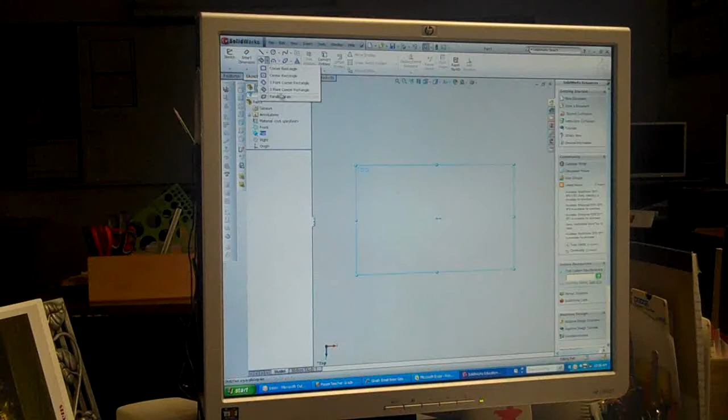Okay, technical drawing, page 596, 1936-1. We're going to go to top view, top plane, and we're going to do a 3-point center rectangle. This is for the vertical piece, the 1.5 square. So you select the origin, stretch out, sort of just create a box.

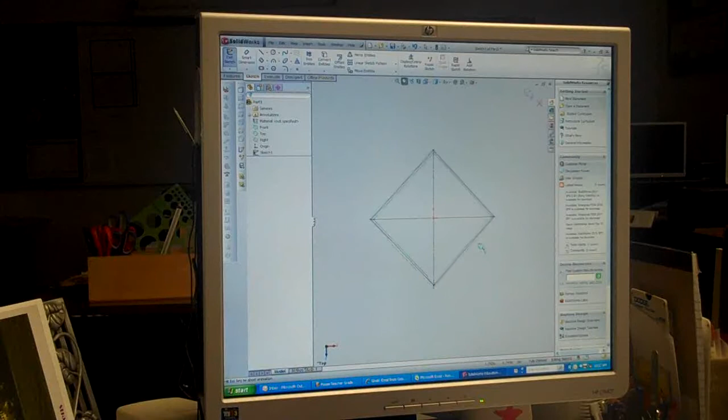We're going to grab this, we're going to add a relation, make it horizontal. Then we're going to grab this piece and add a relation and make it vertical. And then all we have to do to define it is define its outside dimension, which is 1.5 inches. We're going to zoom in. We're going to create our usual offset of 20 thousandths.

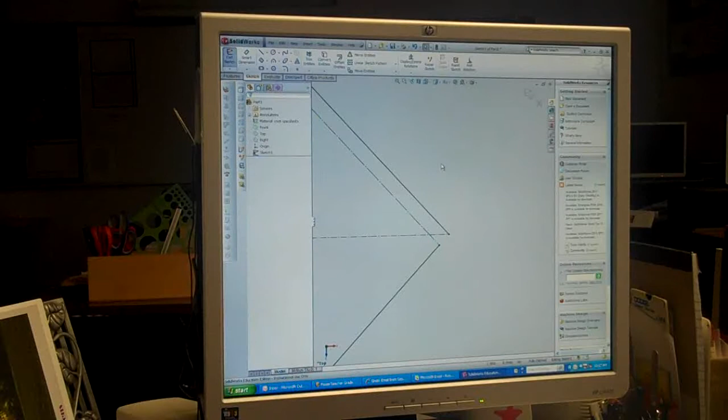Okay. We'll zoom in there. Change that to construction. Happy check mark. We're going to trim closest, create the gap. And what else? Fillet 0.02 at the remaining 3 corners. 1, 2, and 3. And then if we go to the ISO, we can extrude this.

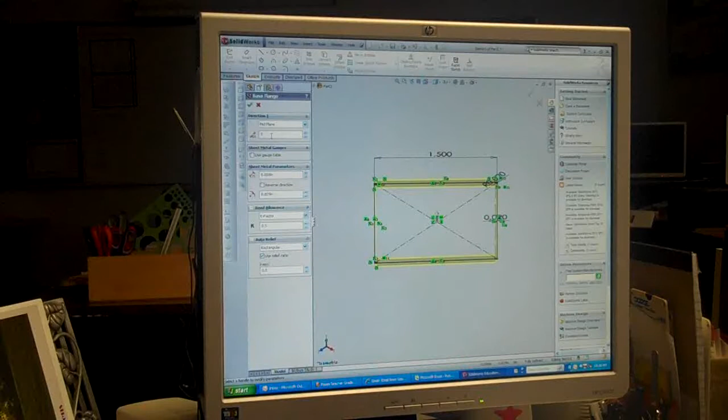We're going to do a mid-plane. This is going to help us because if you look at all these parts, they're all centered, for the most part, about a common axis. So you have to sort of look at what you're drawing and then see where that common axis is. So we're going to do mid-plane. This thing is 3 inches tall. And we're going to keep the thickness as 0.02.

Okay. And let's just check. Like I always say, check, make sure it flattens nicely. Suppress that again. And we're going to save. This part, I'm just going to save it as number 3. You should change it. Save it as 1936-1 for the first part, -2 for the second. We're going to save.

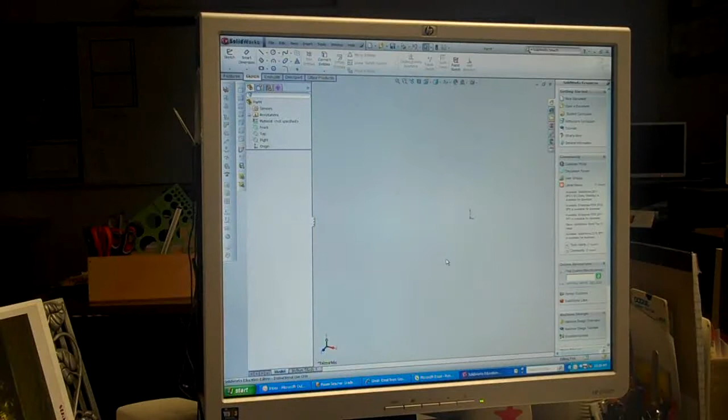File. New. Another American part. USA, because it's all English. We're going to go to the right view. And we are going to sketch on that plane. We're going to do the same type of box. Stretch it out. We can't add relations to anything yet because we need a center line here. And we're going to make this vertical.

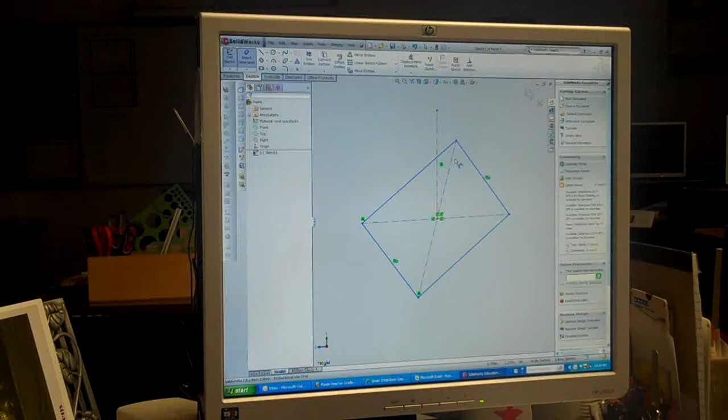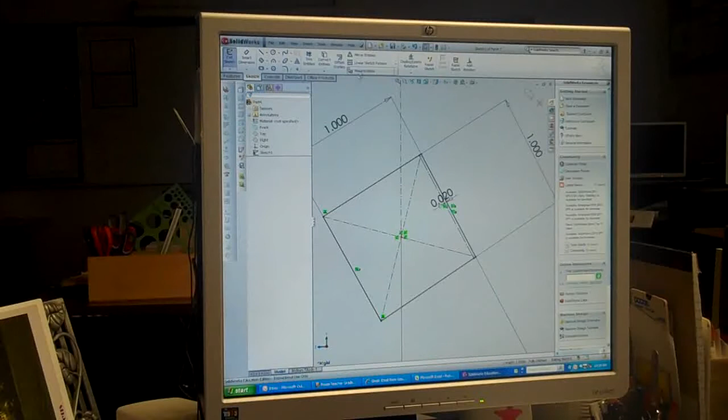Then we're going to dimension this angle, which is 30 degrees from the book. And then we are going to give it its size, which is 1 inch. And 1 inch. Okay, so now it's squared up. Take this part over here, we're going to offset it 20 thousandths, change that offset to a construction line, and then we're going to do the fillets again of 0.02.

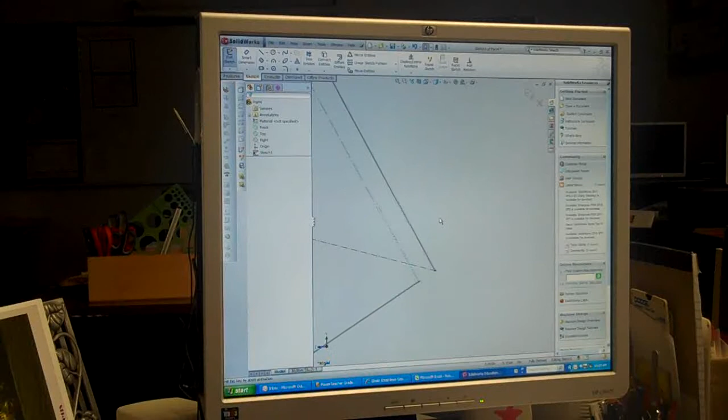Okay. And last thing I'm going to do is create that little gap. Trim closest again. Now this part is 4 inches long, but if you try to make it 4 inches long and then try to cut it in half, I don't think, actually I know, because I've tried it, it's going to unfold correctly. So what we're going to try doing is making 2 parts like this.

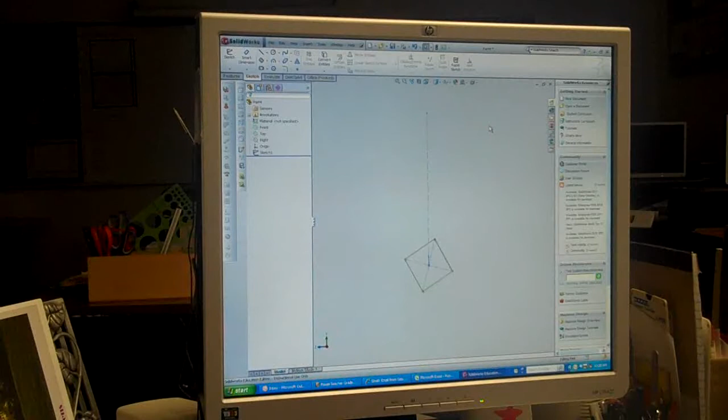So we're going to close this sketch and save it quick as part number 4. And we're going to take this sketch and we're going to extrude it out. And we're just going to go in one direction and we're going to call it 2 inches. Whoops, wrong thing. Leave the thickness at 0.01 and its direction of 2 inches. Okay? So that's part number 4.

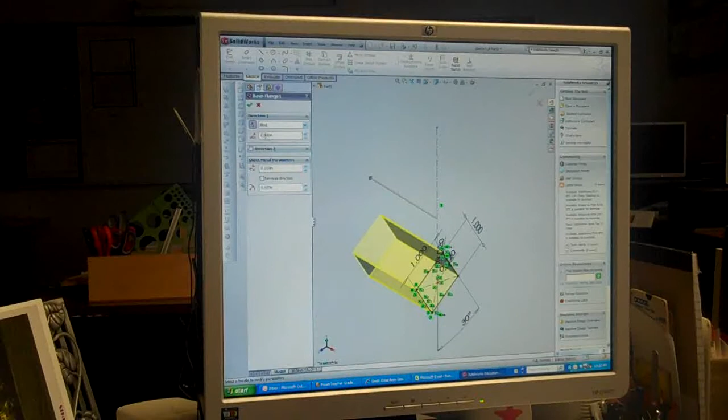And then we're also going to save this as part number 5. Okay? And what I'm going to do is I'm going to edit the feature. I'm going to go blind in the other direction though. And I'm going to save it. Okay, so now I have all 3 parts that I'm going to need. And then the next thing I'm going to do is a new assembly. And I'm going to turn on my origin.

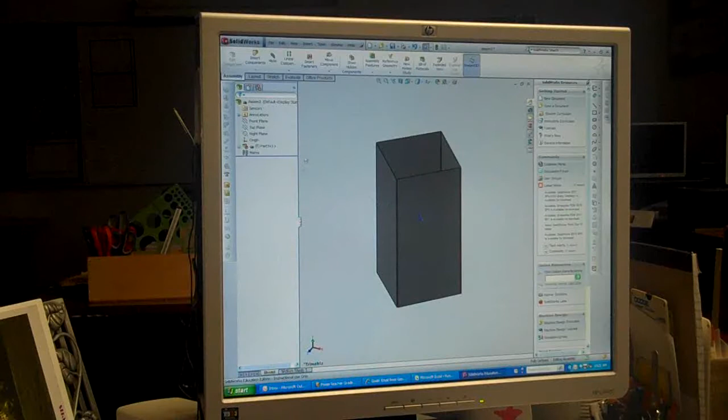And I'm going to insert the first component, which was part number 3, and it was already at its center. So we're going to take it. Then we're going to insert the next component, which is part number 5. This is the rare occasion where you're going to be able to mate these things right to the origin because of the way I drew them from the origin. So you don't have to worry much about mating to planes or center lines or edges or any of that stuff. So we're going to mate that one here.

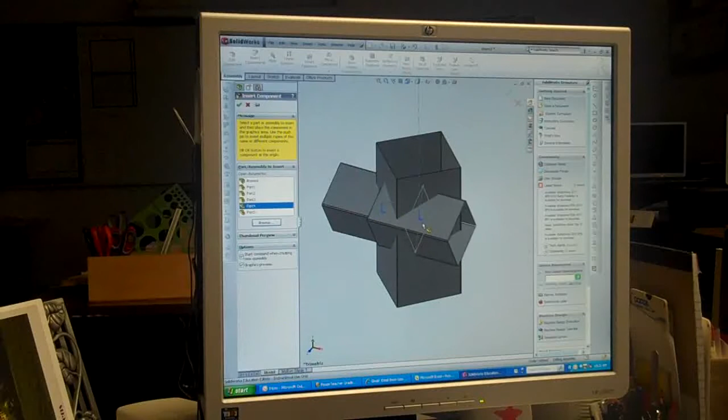And then we're going to go up here and insert component existing. And we're going to browse on the desktop, and we're going to find part number 4. So the origin's on the opposite side, so you just go to the center and it'll automatically pick up the origin and center it. And we're going to save this. It's going to come up as assembly number 3 for me. And that's how you put it all together.

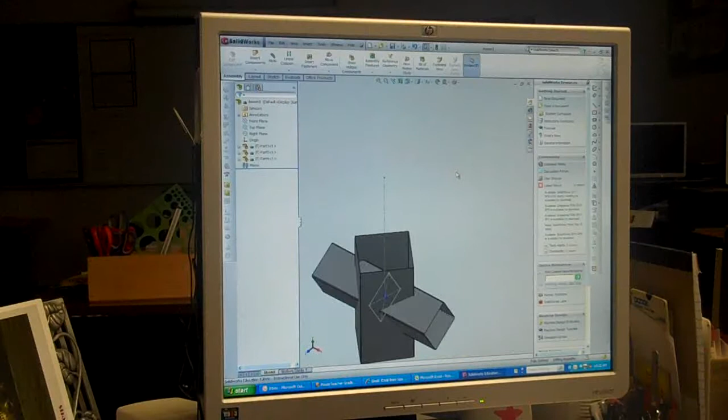Now we need to edit the internals of this to get rid of these pieces of material so I don't have to look at them. And we're going to do that in a second clip, because I don't want these clips to be too long. So there's the part. We're going to stop at this point, and then we're going to start going through and cutting and extruding things.